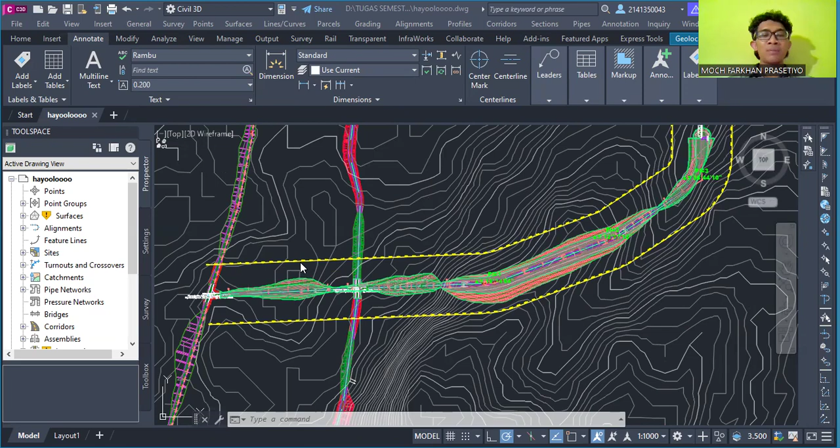Basically, my project is to design a route, way from the Pucuk Brondong Highway to the Paciran Highway, with the final destination being WBL.

My motivation to make this route is to cut time and distance to the site, so tourists can shorten the time and save fuel while crossing the route.

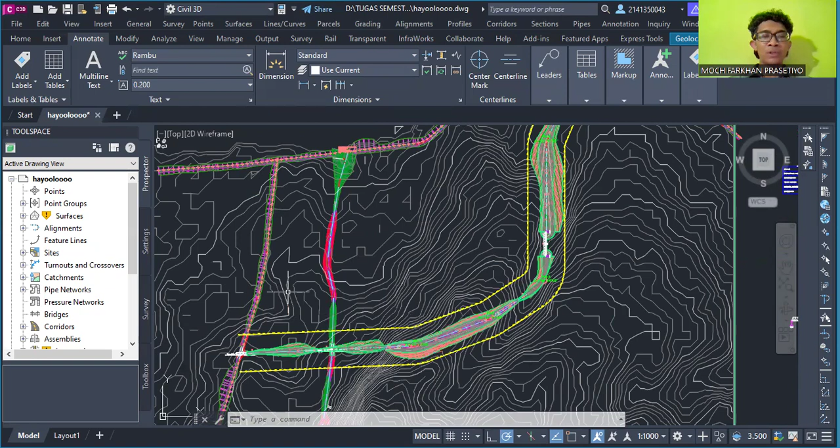The way we know it is inspired by the wave flow of a river that swings to find a path that is easy to pass. So the purpose of building this route follows that philosophy, swinging to look for a more efficient path.

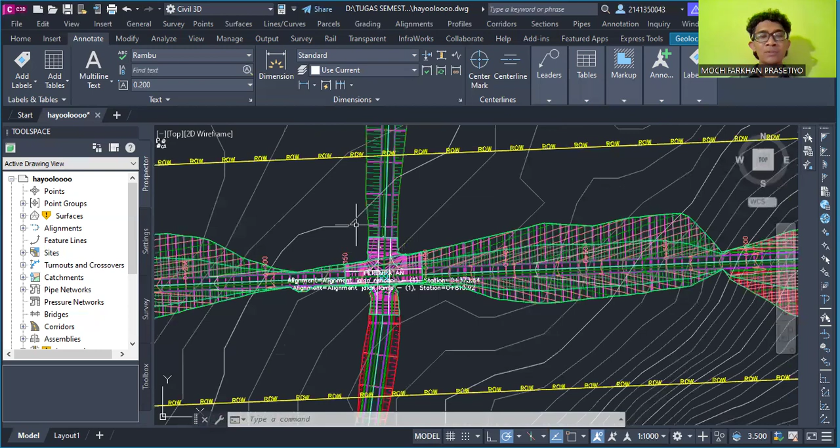The route design near Wisata Bahari Lamongan in East Java, Indonesia, features the following characteristics. Main access route: the primary route leading to WBL, a well-paved asphalt pavement highway, often lined with tropical greenery including forests, creating a scenic drive.

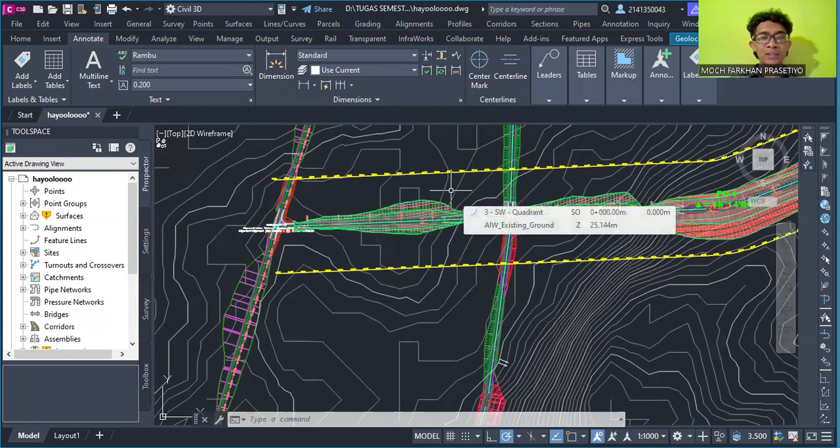The route has clear scenic indications and directions to Wisata Bahari Lamongan, ensuring visitors can easily find their way. Because the topography location is in a hilly area, the process of route construction requires cut and fill to adjust to good route planning.

This is my route in 3 dimensions. I can play this route.

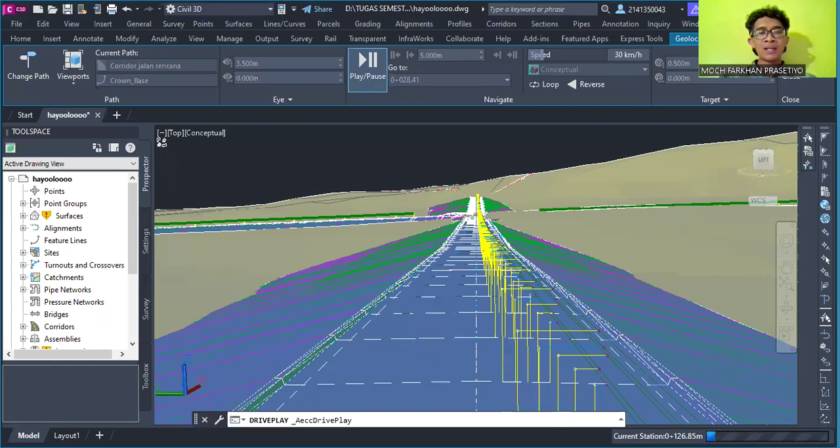Main access route: the primary route leading to WBL is a well-paved asphalt pavement highway, often lined with lush tropical greenery including forests, creating a scenic drive. The route has clear scenic indications and directions to Wisata Bahari Lamongan, ensuring visitors can easily find their way. Because the topographic location is a hilly area, route construction requires cut and fill adjustment.

For good route planning as described above, this route has a lane width and shoulder for each side. The width of the lane is 3.5 meters and the shoulder width is 1.5 meters.

This new route has 4 intersections that cut off other routes. My goal in making this route is to make it easier for tourists to go to WBL, because the original route is turning and far away.

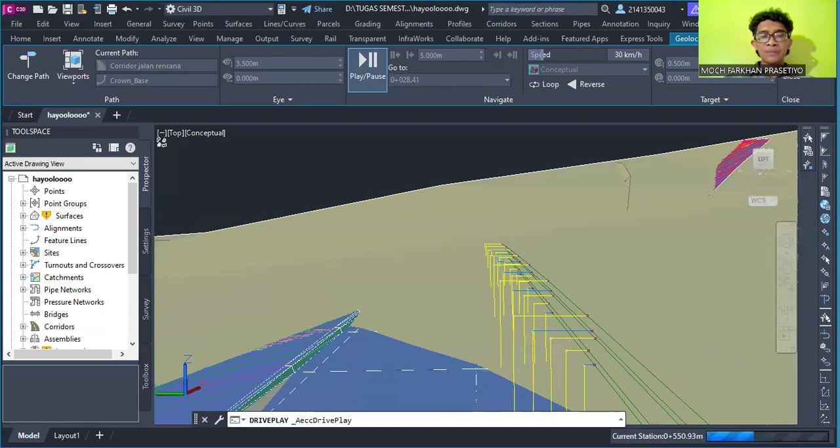Another reason is there is empty ground that makes it possible to build a new route as an alternative. The resulting impact of the route is to facilitate the mobility of citizens around the route, which can raise the economy of the citizens, but the problem of route planning is linked to citizen and land liberation permits.

For efficiency reasons, my interest is to make this route on high ground and by the sea, so that you can also see the good scenery.

The construction of a route that follows the flow of a river has an underlying philosophy and consideration. Here is the philosophy behind the design: topography and route efficiency, adapting to natural contours. Rivers usually flow through paths with minimal slope, so building a route that follows the river flow is often easier.

It is also energy efficient by following the natural contour. This provides accessibility and development of territory, including access to water resources. Roads built near rivers provide easier access to water resources, which are important for settlement, agriculture, and industry.

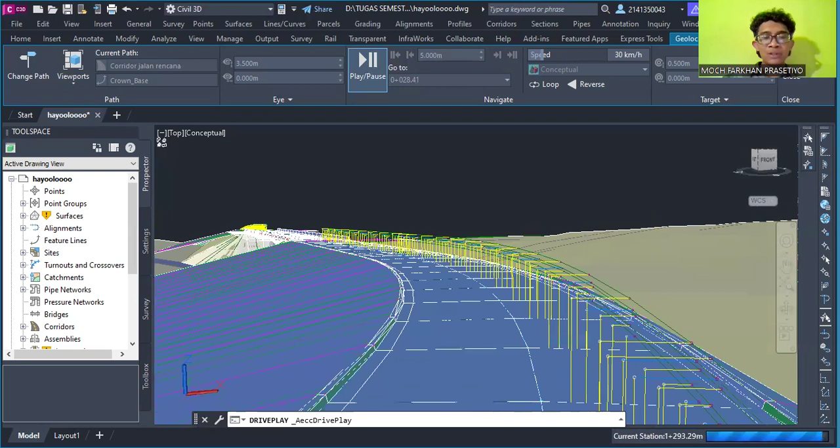Economic development: the river is often the center of economic activities such as trade and transportation. A route that follows the river can support and accelerate economic development in the region.

Sustainability: minimizing environmental interference with the ecosystem by following the natural path of the river. Road construction can reduce the impact on the existing environment and ecosystem compared to opening a new path that would interfere with flora and fauna habitat.

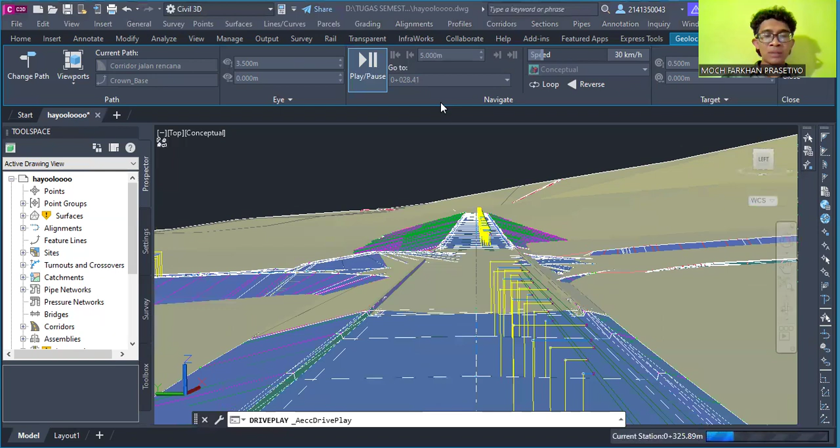Flood management: a route that considers the river flow pattern can be designed to better cope with and manage flood risk, for example by providing a good drainage system or sustainability measures to avoid water stagnation.

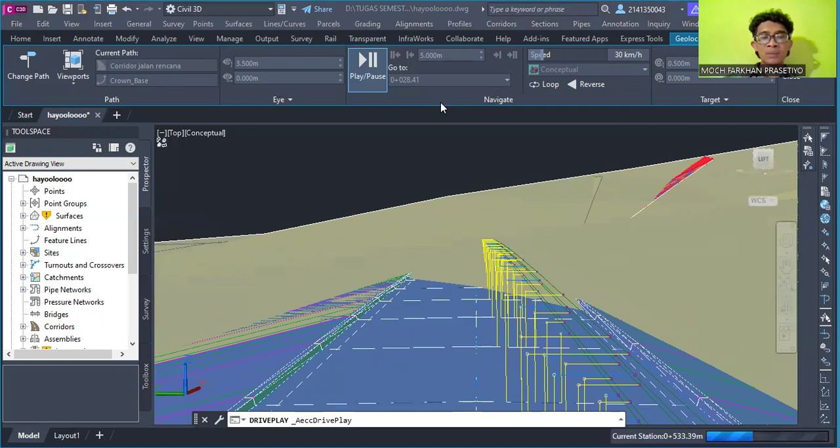The design speed of this road planning is 30 km per hour, with a maximum accessibility load of 8 tons. The material used, from the bottom up, is the underground base foundation, then the top foundation of sand, cement, and asphalt.

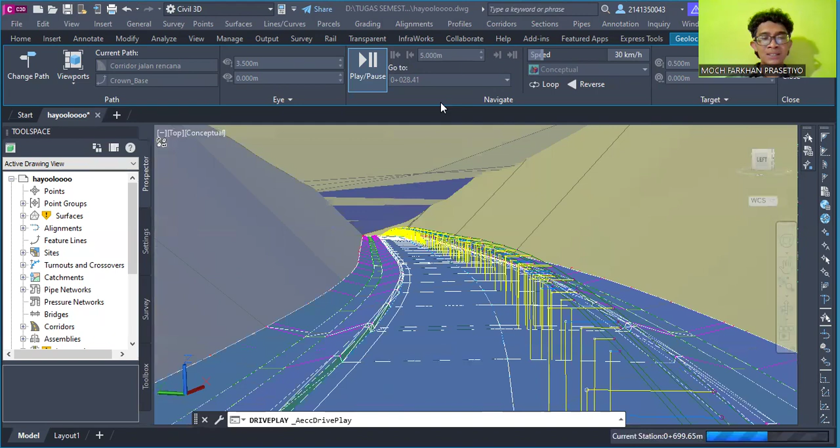The construction method is the same as the construction of other roads, one layer at 1 meter. The challenge when working on this design is calculating the cut and fill, as well as calculating the slope of the road.

So by making this road, I hope it can make access easier, shorten travel time, and save travel costs. Thank you, this is my road.